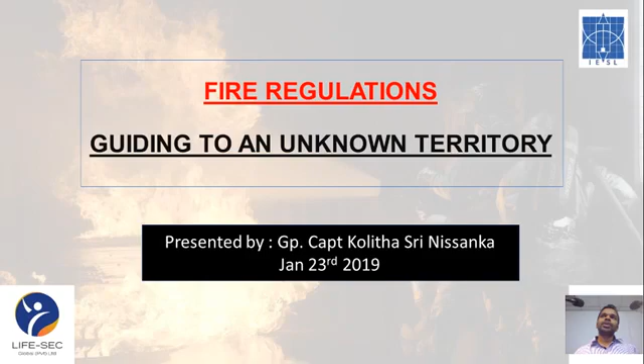Sri Lankan fire regulations were recently revised in 2018 with comprehensive attention for high-rise and super high-rise buildings. In this lecture, we are about to discuss important aspects of designing and maintaining fire systems and life safety systems for those skyscrapers.

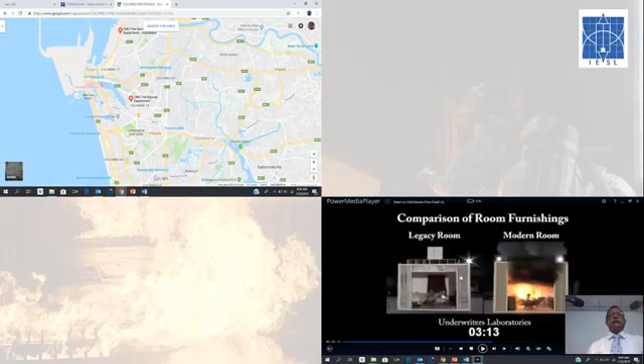Now I just want to share one slide - I am showing where this Colombo Fire Brigade is located. We have 4 stations in Colombo Fire Brigade responding to fires in the city of Colombo. I don't think it's very clear, but we have 4 stations.

This is a US test done on a room fire. It shows that within 3.5 minutes the entire room comes to a flashover point - that is, the total room is burning. So you have 3.5 minutes to respond, and you have 4 fire stations in Colombo, and you know the traffic - how long it will take to reach the incident, and then the time to reach 30 floors or 40 floors, what time will that take?

My sequence will be: I will review and give an overview of regulation, specification and standard - what is the clear distinction, what is the difference between them. The fire brigade requirements - what do you mean by a fire brigade requirement? CIDA regulations, important aspects of CIDA regulations, and then we will go for questions.

Now, who is the regulator? I was trying to go through the web and find out who is the regulator of fire safety. Who is in charge? Who is the implementer? Now we have the Motor Traffic Act, we know the regulator, we know the implementer. There are regulations, you go on the road drunk, you will get fined. Now here, who is the regulator in fire?

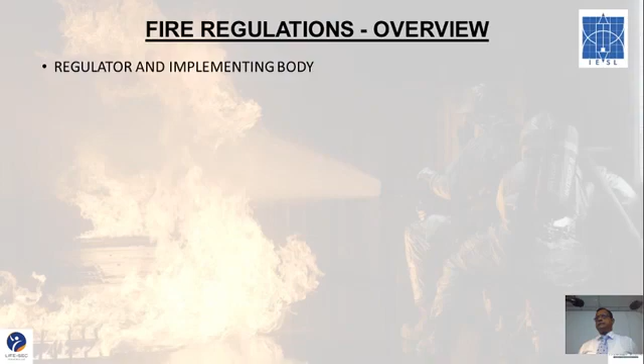Now the buildings are regulated by the UDA and the urban councils, and when you want to put up a building, you need to go to either UDA or municipal council to get the approval. Similarly, CIDA, which has now got an act passed by the parliament, it talks, we'll just glance through what it says.

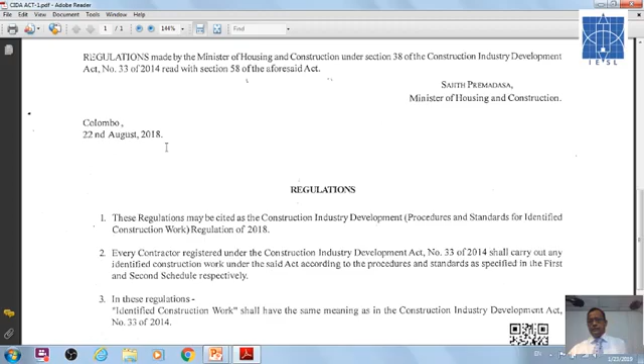It's passed in 2018. Every contractor registered under the Construction Industry Development Act number 33 of 2014 shall carry out any identified construction work under the said act according to the procedures and standard as specified in the first and second schedules respectively. It clearly says you have to comply, and we'll see what the two schedules are.

Under schedule 2, they are referring to 2 regulations. The CIDA fire regulations and the CIDA specifications. There are 2 documents. This is fire regulation, this is a specification. This was done in 2016, this was revised in 2018.

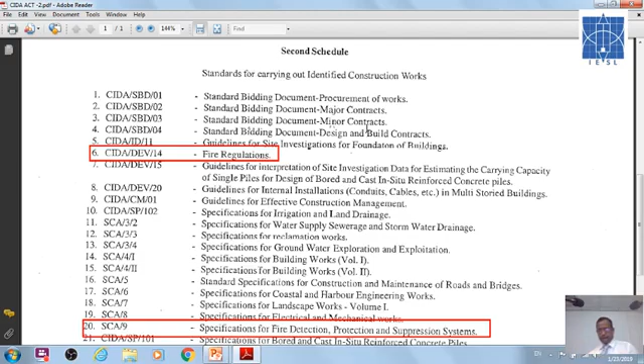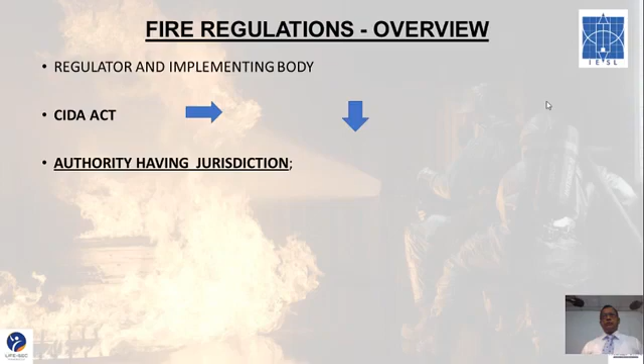Now there is another party coming into play, that is the authority having jurisdiction. Now here we call, what is the authority having jurisdiction is the local fire brigade. So far we see them as the implementing body. Finally, once you do your system, you want to get the certificate, you have to go to the fire brigade and get the certificate. The best part is the fire brigade has their own requirements.

I will show one of the requirements. This is a requirement given to a project. They give a requirement saying this is from the fire brigade. You go to the fire brigade with your drawings, you have to sit there, you give it to them and they will give you this requirement. So you see, they give their requirements, they are the regulator and the implementer, both one party.

What will happen? So I don't want to comment further on that. So that's why we are focusing on the CIDA, and we are trying to tell the fire brigade, you need to comply with the CIDA fire regulation, that is the governing regulation in this country.

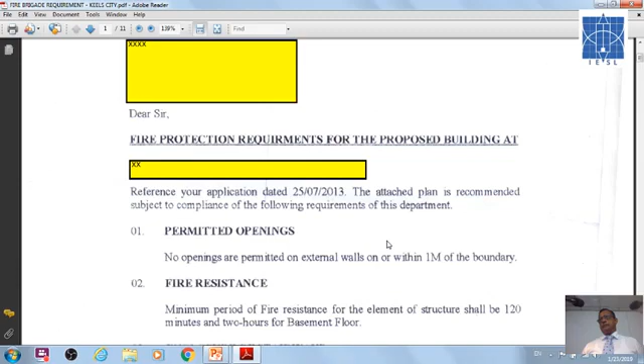So on 30th of next month, we are going to have a seminar. We want to call all the fire chiefs at the CIDA, educate them on the fire regulations.

Now, what is a regulation? Regulation, I got it from Wikipedia. A rule or order issued by an executive authority or regulatory agency for government and having a force of law. So a regulation is having a force of law. When you have a force of law, you can be convicted by a court of law.

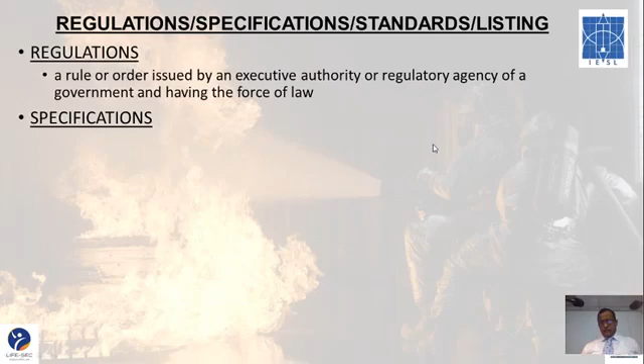The specification. What is the specification? We define it as the act of identifying something precisely or stating a precise requirement. We call this document a specification. Later we want to call it a code of practice. Say you have a fire detector, we give a specification for the fire detector. We have a fire pump, you give a specification for the fire pump.

So the regulation and the specification are two different things. Regulation says what you need to do. You need to install a fire pump. The specification will tell you what type of fire pump you need to install. So there are two distinguished areas, specification and regulation.

Then what are the standards? Something considered by authority or general consent as a basis of comparison, approval, or model. Now here we normally focus on NFPA, National Fire Protection Association from the USA, and the British standards. Now people are asking, why won't you go for German standards, Japanese standards, or later why not Chinese standards? They will come and tell all this.

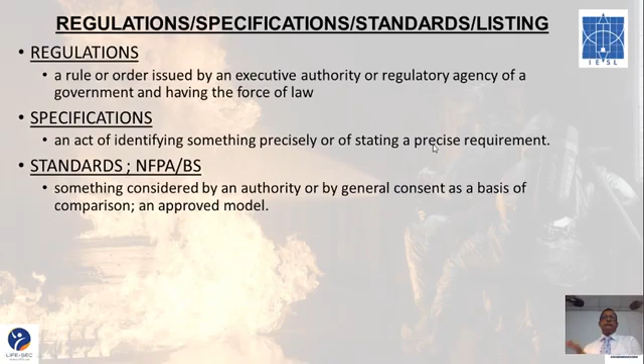Now we have decided to have our vehicles right-hand drive. We decided that long time ago, and we imported vehicles which have a right-hand drive. But there are other countries who have left-hand drive. So we can't argue, the left-hand drive vehicles also can go at high speed. But here we have decided, we are focusing, we are referencing these two standards.

Then the listing. We have listing. What it means by listing is a certification from a third party. The NFPA and the BS are standards. Standards will say, now if you talk about sprinklers, the NFPA will say go by sprinkler standard NFPA 13. So it will give you how to design a sprinkler system for a particular standard.

Recently I had a problem. We supplied equipment and the equipment was UL listed. UL listed means it complies to NFPA standard, because NFPA is a USA standard. UL is a USA governed body, and anybody can get a UL certificate. It doesn't need, even Sri Lankan we can produce a product and get a US certificate. So this project manager was telling, you have given me a UL listed pump, but we do our electrical design as per BS, so your fire pump electrical panel does not meet our standards.

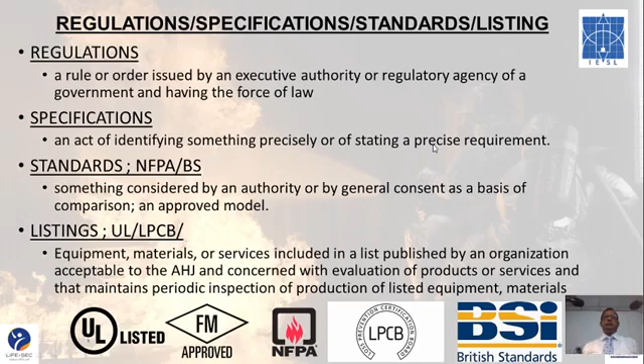I was feeling sorry for him, because you need to define NFPA and UL are different, BS and LPCB are different, their standards are different. So when you say your fire pump has to be listed, that means it has to be certified by a third party. Say your fire panel has to be listed, that means it has to be certified by UL, LPCB. Even the DIN standards are there, but focus is on UL, FM and LPCB.

Fire regulation initially published in 1997, revised in 2006, and latest revision is 2018. It took more than 2 years to do the revision, and people from IESL, Institute of Architects, Institute of Fire Engineers, Fire Brigade, everybody was involved in this committee. So it was an idea of all professionals in the field to put this document through.

Now fire regulation, this book we had divided into 8 chapters. I will not have time to cover all the 8 chapters, but the things I have highlighted in red, we will just go through that to see what are the important areas.

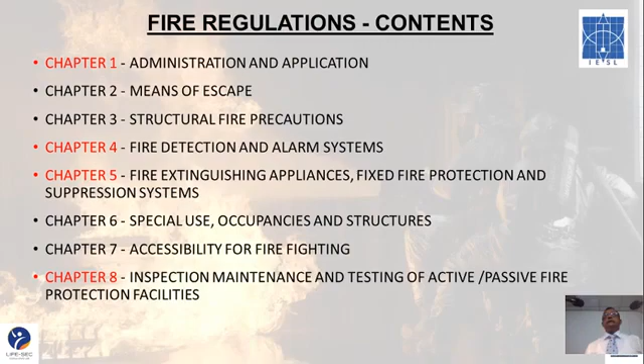New edition focuses on a few key things. One is the residential dwelling, because this regulation has purpose groups. Purpose groups mean, say now this hall is a lecture hall and this is an institute, so the institute goes as a purpose group as institute. If you take a hotel, the purpose group is a hotel. If you take an office, it's an office. Now earlier we didn't have a purpose group for the apartments.

So apartments, people who are constructing apartments had various ways of getting out from the regulations. If you go around to apartments, we say any building over 30 meters has to be sprinkled. You check the apartments, they are not sprinkled. But since there were no purpose group, they had some escape path.

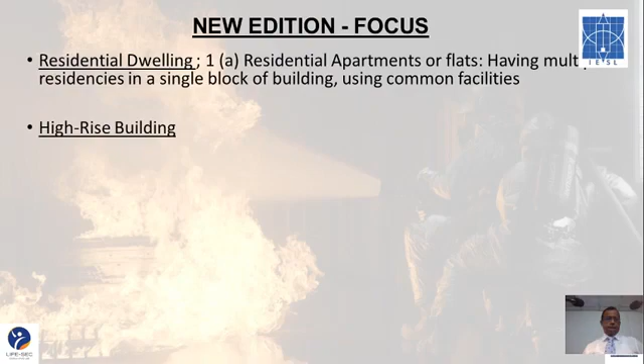Then the high-rise building. A high-rise building is a building which is more than 30 meters high, up to 60 meters. And now the new concept came, a super high-rise building. What is a super high-rise building? It's a building that is more than 60 meters high. If you take 3 meters per floor, that is 20 floors and above, and we call them a super high-rise building. For super high-rise, basically we have stringent regulations, and we'll touch on a few.

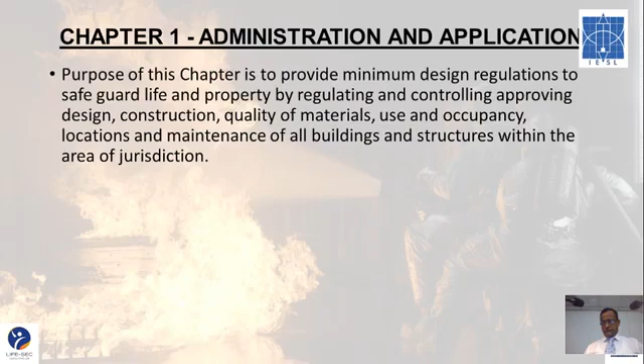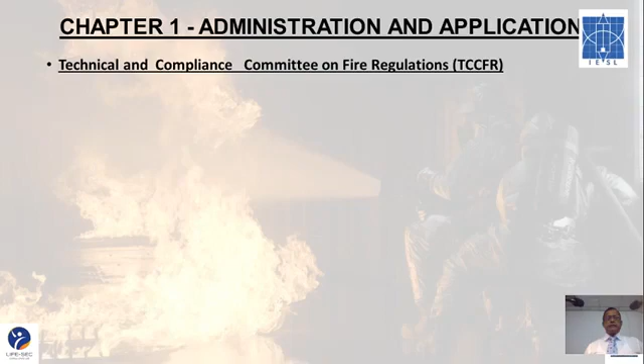So the first chapter talks about the administration and application of the regulation. Under this chapter, CEDA has appointed a technical compliance committee on fire regulation. They have a 5-member committee. They are responsible to advise the authority having jurisdiction on any technical matters where such advice is required to take a final decision. Say you take your plan to the fire brigade, then they come to a dispute, and say I don't want to sprinkler my building, but I cover certain regulations. If there's a dispute, the client can come to the CEDA and make their complaint.

On the other hand, it has to be very careful. The occupier who is occupying a building, he knows the regulation and he occupies an apartment. He knows that that apartment is not sprinkled, and he sees the regulation that you need to sprinkle. Then the developer is in question. So then this committee will take a decision whether to put sprinklers or what needs to be done.

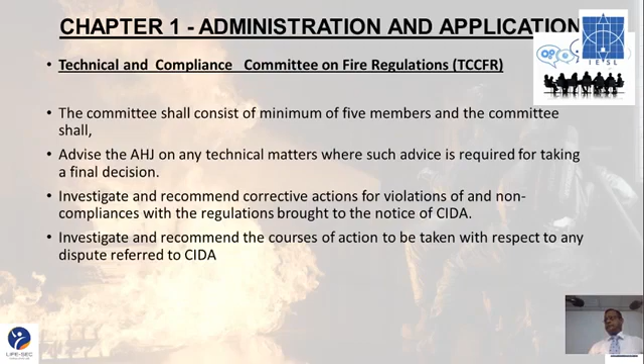Investigate and recommend the course of action to be taken in respect of any dispute referred to CIDA. So that mechanism will come maybe another 1 or 2 months, it will be enforced. We don't want people to come to CIDA and stay in a queue and say my building, this building, ABC. There will be a procedure laid out, a payment will be charged. So there will be a procedure put down by the CIDA.

Then the system install. Now today what happens, anybody can do any systems. If I want to start up a business tomorrow, I can do a fire system tomorrow. We strongly say any contractor has to be registered with the CIDA. There are categories under which you can be registered, and only people who have qualified for certain requirements can do high-rise buildings or super high-rise buildings.

Now what about these Chinese guys who come and do this work? It's a big question now, whether they are authorized to do that, and for any violation, how can we take them to courts? So all those are questionable. One thing we must say, when we had this regulation, CIDA published it on the web, and we waited for 1.5 to 2 months to get public comments. Fortunately or unfortunately, we got only one guy commenting.

So where were others? We had a seminar, about 200 people came, nobody commented, nobody said a word about the regulation. We wanted public opinion, your input to at least revise or do additions to amend the regulation, but nothing happened.

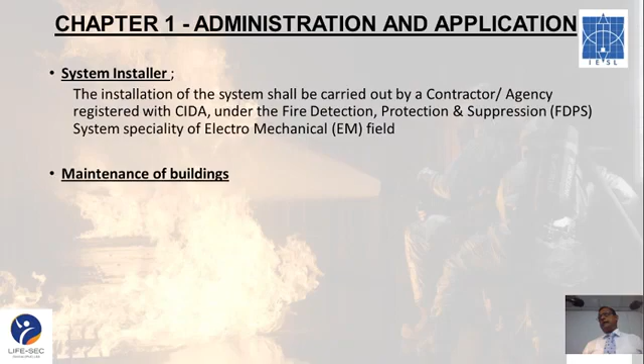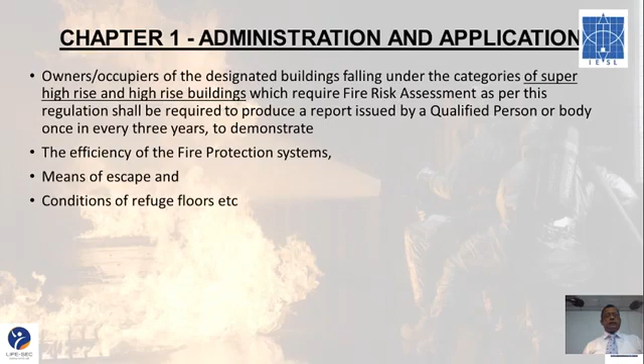Anyway, now the document is out, you can buy it, and it's governed by an Act of Parliament. So the people who do any installation are under certain law of this country. Maintenance, people neglect maintenance, but under this act, people have to maintain their systems. Owners and occupiers of any high-rise, super high-rise building, every 3 years have to do a fire risk assessment and get certified from a qualified person or the authority having jurisdiction, about the efficiency of the fire protection system, the means of escape, condition of the refuge floor. Those are the areas they will have to go and check.

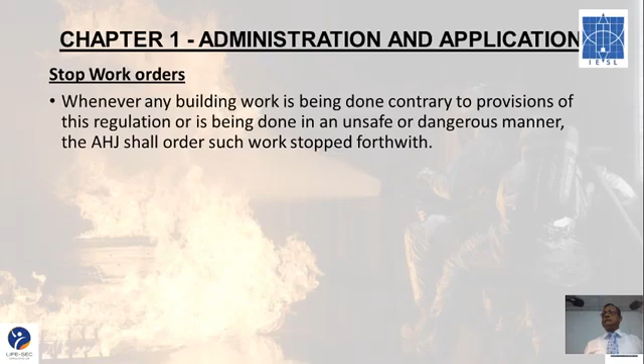Stop work orders - it doesn't happen here. If any site does not abide by the regulation, the fire chief can go and do a stop work order. In time to come, it should happen. I hope the fire brigade has some guts to do that. On receipt of some notice of stoppage work, they had to give it in writing - okay, we didn't do the sprinklers, but now we are compliant with the regulation - giving in writing that we will comply with the regulation and proceed with the work.

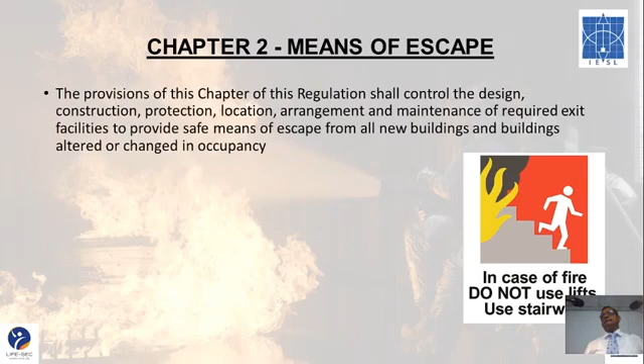Then chapter 2 talks about the means of escape. If you are an engineer involved in this field, go to the new buildings which have been done recently and check the means of escape. You will see those means of escape in some buildings are not done properly, especially the smoke-free lobby. There are no smoke-free lobbies in some very key buildings here. I don't want to mention names, but it's not done, right? If you go there, your means of escape is not protected, which means in case of fire, when you are going out, you will be under the smoke, you will not see anything.

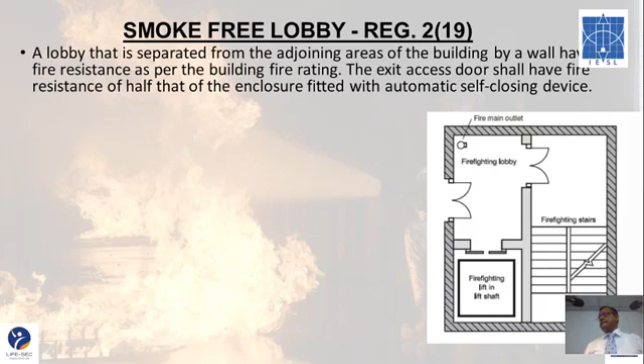The design of the smoke lobby shall not impede the movement of occupants through - that means the clear passage should be there for people to move through the smoke-free lobby to the escape, that is the firefighting staircase. Floor area of the smoke lobby shall not be less than 3 square meters. And if the smoke-free lobby is taken as the firefighting shaft lobby, it has to be 6 square meters of space. You can't have a 1 meter stretch covering 6 meters - minimum should be 2 meters. Adequate space must be there.

Then chapter 3 talks about structural fire precaution - I will not go into detail. That is to prevent fire spreading from one area to another. Now the Sri Lanka standard today is the compartmentation size is 2000 square meters, and if the building is sprinklered, you can go up to 4000 square meters. So if you take this hall at 6000 square meters, you can't have an open hall like that. If it's sprinklered, you need to compartment it for 4000, you have to divide it. That is what is meant by compartmentation.

And even floor-wise, you've seen a lot of people talk about the Grenfell fire - people are brought here to give lectures, right, we invite them. What happened? There were no barriers. The fire spread to the outer wall cladding, and smoke went through the inner ducts. Even if you go to buildings today, I check half of the building, the ducts are not sealed, there is no protective sealing done. Sometimes they come to the fire brigade and ask, can we only seal the electrical duct, because the water duct doesn't carry any electrical components, so there won't be any smoke building up in the plumbing duct? No - smoke can move through the plumbing duct to other floors.

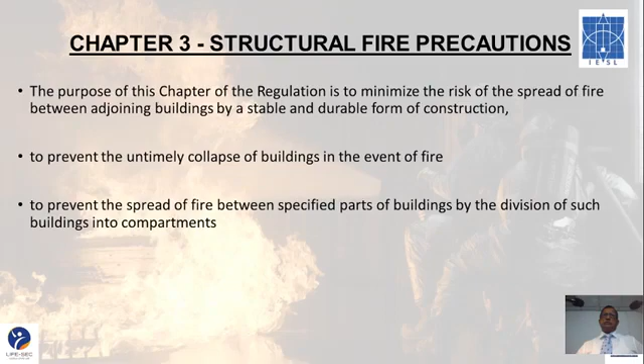Another thing that came into the regulation is the refuge. Now any super high-rise building over 60 meters has to have a refuge area every 10 floors.

You count the 10 floors from the top, not from the bottom, because people from the top will travel down. So every 10 floors you will have a refuge floor and a refuge area for people to stay until the fire is being fought and people are evacuated slowly.

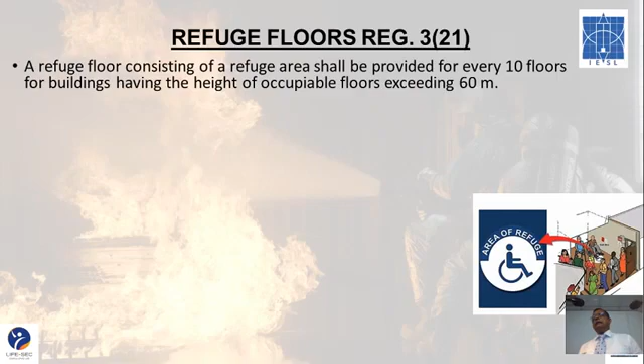How do you calculate? You take the occupancy load of the 10 floors, take 50% of that, and for that area you have to keep a minimum of 0.5 square meters per person. I will not go into detail on how you calculate occupancy load, but if you take a hotel, occupancy load is 2 people per room. If there are 100 rooms, that's 200 people, so 50% is 100 people. 100 into 0.5 is the area.

It's very simple, and you need to have cross ventilation, 25% area on 2 sides. So the refuge floor is a very important aspect in a super high-rise building, and you need to ensure that your building has that refuge floor.

Why do you need a refuge floor? Because people at top floors cannot come to the ground floor within 3 minutes. So they will come down the fire staircase and rest maybe at the refuge floor and come down like that. If the building is on fire for 3 hours, 6 hours, people can travel but shouldn't wait there till 6 hours - maybe within 1 hour they should come down, because the walls are rated for a maximum of 3 hours fire rating, so they should come down.

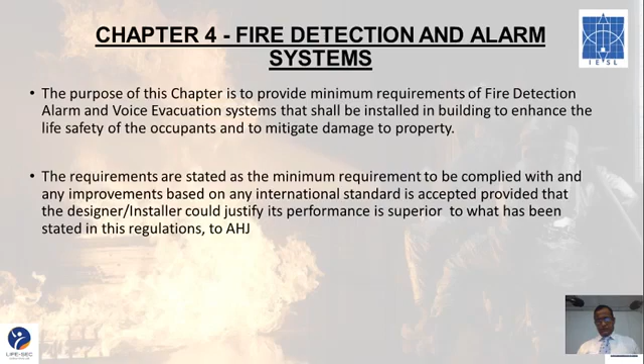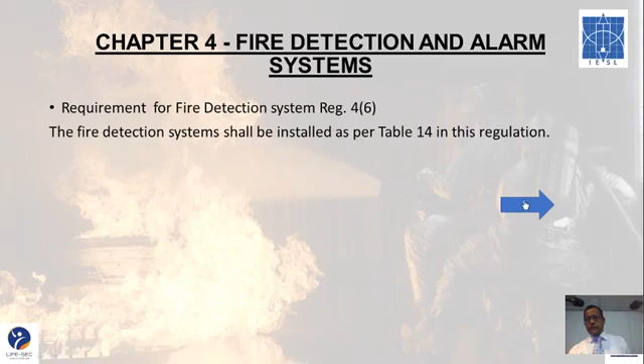Now the regulation gives a very brief guideline. Say you want to design a building and want to know whether it needs a fire detection system or not - whether I should put detectors, call points, voice evacuation, fireman communication - so we made it very simple. We are given Table 14, where purpose group is given, height is given, then manual point, fire detection, voice evacuation, fireman communication are given as required or not required.

So it's very easy to refer. You are designing a building, you refer this table and see, yes, this building requires this, that's the regulation. Then you go further to design the system as per NFPA or BS or the fire specification. One thing is, any building with over 100 detectors should go for an addressable fire detection system, not a conventional system - that is in the regulation. So this table is a very quick reference guideline.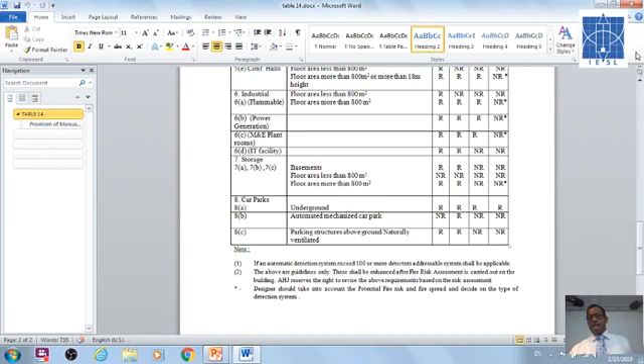Fire alarm control panel has to be at the fire command center. Any high-rise or super high-rise building will have a fire command center, 10 square meters in size. Now some buildings find it very difficult to locate this fire command center - why? Because the ground floor is the most important floor in a building, high value commercially, you can put a shop there. If you can put a shop, why are you putting a fire command center? Commercial value is there, but it's very important you have your fire command center at the ground floor.

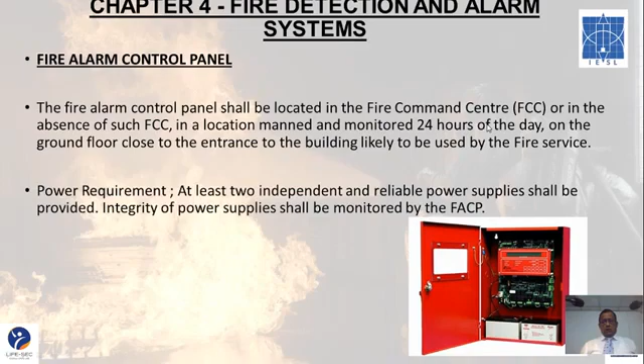Power requirement - at least 2 power sources, main and battery power, should be there. How do you check the battery power? You have to keep the fire panel for 24 hours on battery and check the alarm for another 5 minutes. So if you are going to check a fire system, you need to switch off the main power, keep the fire alarm panel on battery for 24 hours. After 24 hours you sound all the alarms, and for 5 minutes the battery should be able to keep the system going with all the sounders working.

On normal operating conditions, if you want to check a system after installation, you have the entire alarm going for 30 minutes on the battery. So if somebody had not done the proper battery calculation, what will happen? After 5 minutes, the panel will go to a halt. That is the requirement.

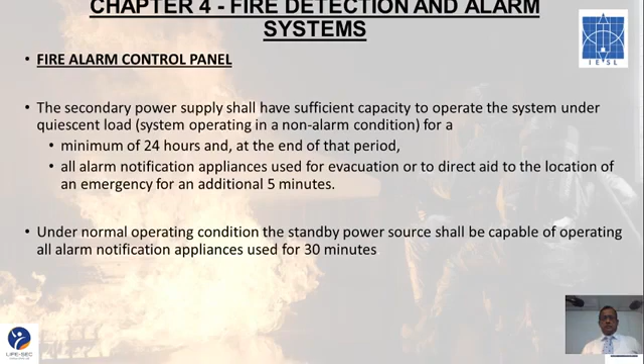Sound level should be 65 decibels, 10 decibels above ambient. Noise level should not exceed 120, and especially in a hotel or apartment, 75 decibels at the bed head, at the pillow, with all doors closed.

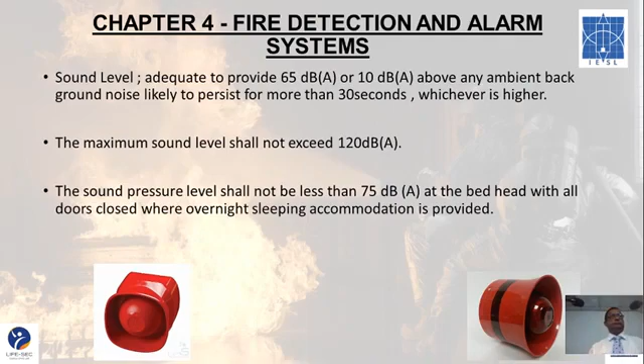Visual alarms - why should you have visual alarms? In a hospital, can you have alarms going off for a false alarm? The fire detection system is there to detect fire, not to have alarms going and evacuate people. It is there to give a signal saying there is a fire. People have to react and extinguish the fire, not wait until the alarm goes and everyone runs out of the premises. That is not the purpose of a fire alarm system.

Where accommodation is provided for disabled people, both visual and audible alarms must be provided. Visual alarms must be installed 2.1 meters above the floor, and less than 150 millimeters from the ceiling.

Voice evacuation - what do you mean by voice evacuation? People take a public address system as voice evacuation. You can use it, provided the public address system is monitored, the cables are fire rated, and if a speaker is removed it gives a monitoring signal. The voice evacuation system is used to evacuate and guide people in case of a fire.

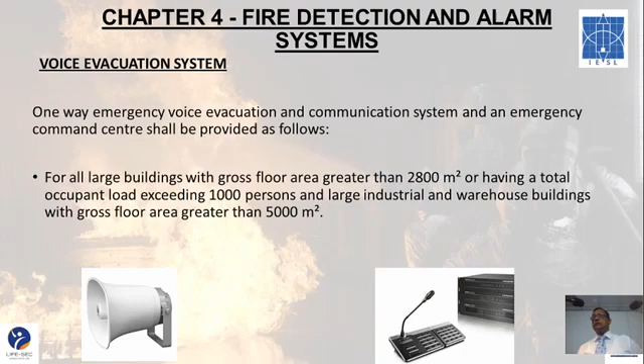Voice evacuation is required in a building greater than 2,800 square meters or a total occupant load of 1,000 persons, or in an industrial warehouse where the floor area is more than 5,000 square meters. Especially in high-rise and super high-rise buildings, voice evacuation is a must.

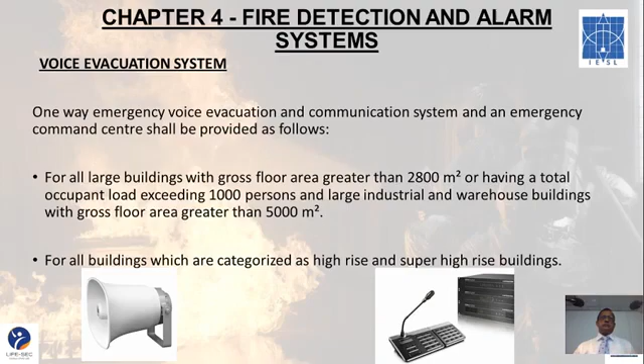Voice evacuation activates automatically when detectors are triggered, giving a voice message saying there is a fire on the 29th floor, please be patient or please evacuate, and simultaneously giving another message to other floors: there is a fire at the 29th floor, 30th and 31st floor please evacuate. Sounders will only give a sound, they will not give you direction. So this type of building needs a voice evacuation system.

Firefighters telecommunication is another requirement in high-rise and super high-rise buildings. Why do you need it? So firefighters can speak with each other inside the building. If you go to a pump house in the basement, your mobile will not work, there is no way of communication, so you need a firefighters telephone communication system installed.

It's required in every firefighting lobby, in basements where the number of basements exceeds 2, firefighting related mechanical rooms, fire service lift rooms, areas having smoke control equipment, each area of refuge, and also the fire pump room.

The circuits must be monitored - that means if there is a cut, breakage, or defect in the cabling, it must be monitored by the fire alarm panel, so the system is monitored 24 hours.

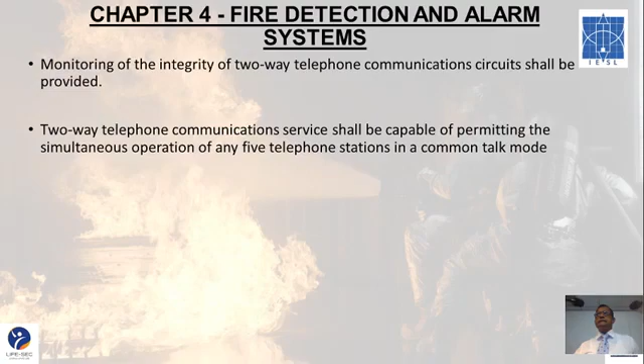The two-way telephone communication system must have 5 telephones working simultaneously. That means if 5 firefighters go to 5 floors, they can plug in their phones and 5 people can talk simultaneously. You can't have only one telephone working at a time - that is not approved. You must have 5 telephones where people can speak simultaneously.

Temporary building construction must have a siren. That is something we have newly put in.

That covers fire detection, the main areas. If you go to the document there are so many things you need to abide by. Please refer to the document if you are designing a system or if you are the developer. It's always better - I have been in the construction field for maybe the last 12 years. What happens is people don't decide at the initial stage, and meetings become a place to come and fight with each other.

Sometimes halfway through building construction, they decide to put detectors inside the apartments. The building is already 5 floors raised and they decide to put sprinklers in the apartments. So decisions are not taken initially. To avoid that, it's always better to go through the specification, go through the requirement, design your building, get it cleared, then proceed.

Similarly, on the fire protection side, chapter 5, we have also given a table. That table shows purpose, scope, height of the building, whether you need fire extinguishers, whether you need hose reels, whether you need landing valves, whether you need sprinklers.

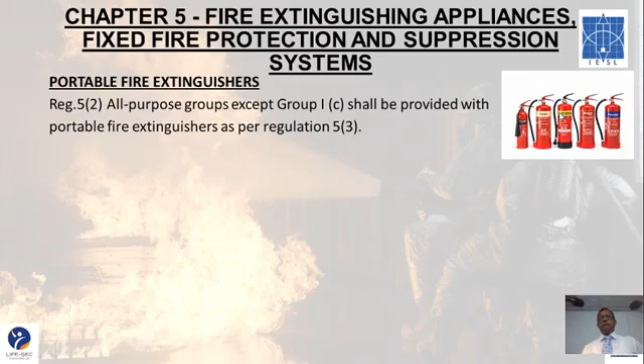Maximum design pressure is another thing we incorporated. It's set at 20 bar - you can't exceed your fire pump or system pressure beyond that. The NFPA standard is 23 bar, but there's one project in Colombo now requesting 30 bar pressure. So if your system is 20 bar, what should be your testing pressure for the pipes?

It's 1.5 times the design pressure. So if it's 20 bar, how much would that be? Once you add the rest, it comes up to 30 bar. The GI pipe maximum burst pressure is 40 bar, so then you have to go for PN25 or 40 valves. So many things you have to consider - that's why we set it at 20 bar.

Why are people going for high pressure? They want to avoid putting pumps in the center of the building. Some projects here in Sri Lanka have pumps on the 29th or 30th floor - they transfer water using tanks, and the balance section is run by those fire pumps. So if you have a high pressure pump, what they want to do is knock off the pumps at the middle stages and pump water right from the bottom.

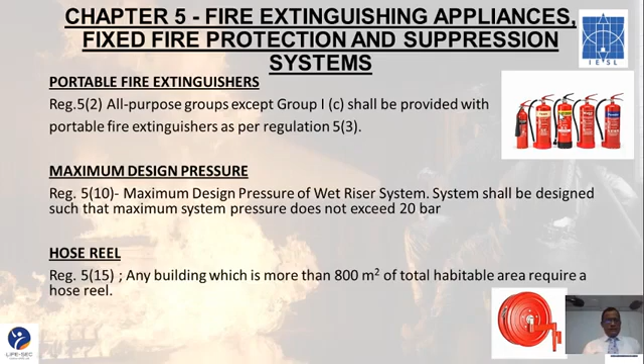Hose reel - any building over 800 square meters needs to have a hose reel. I'm just running through this quickly - I have 53 slides to cover in 60 minutes. These are all in the document, not just my words.

Landing valves - any building over 900 square meters needs a landing valve, and over 18 meters height as well. What is a hose reel? It's a first aid system that people in the building can use. A landing valve is equipment that carries water, used by fire brigade personnel when they arrive during a fire.

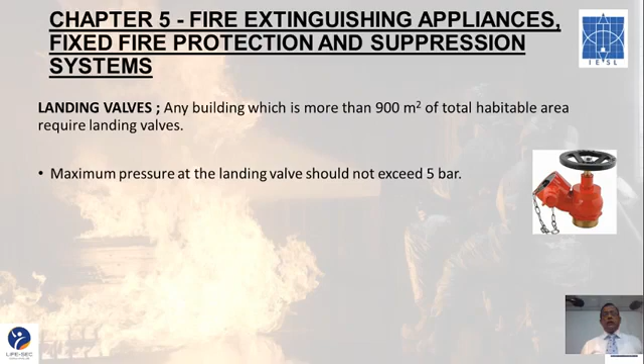Maximum pressure is 5 bar, minimum is 4 bar at the landing valve, with a flow rate of 500 liters per minute. Now some engineers, even when the pressure is 11 or 12 bar, still keep it at 1500 liters per minute, because three landing valves must operate simultaneously - meaning the fire pump should deliver 1500 liters per minute, since three landing valves should operate, that's 500 times 3.

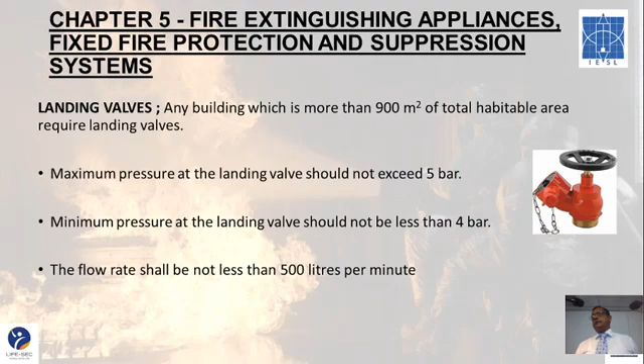So what happens when the building is high and the pressure is high - there are no pumps that deliver 1500 liters at, say, 15 bar. So you need to adjust the flow to maybe 800, 900, or 1000 liters per minute.

External pillar hydrant - any building with a footprint area more than 1000 square meters needs a pillar hydrant. So it's very clear - any factory over 1000 square meters, or any housing scheme with 100 units, needs to have a pillar hydrant system.

Breaching inlet - traditionally we had only one breaching inlet, but with high-rise and super high-rise buildings coming up, you need an additional fire brigade inlet to pump water to the sump. This is because fire brigade vehicles cannot pump water beyond 10 or 14 floors. So if the building height is 60 meters, you need to use internal fire pumps to pump water, since the capacity of the water tank is limited - once it's over, fire vehicles need to pump water into your sump.

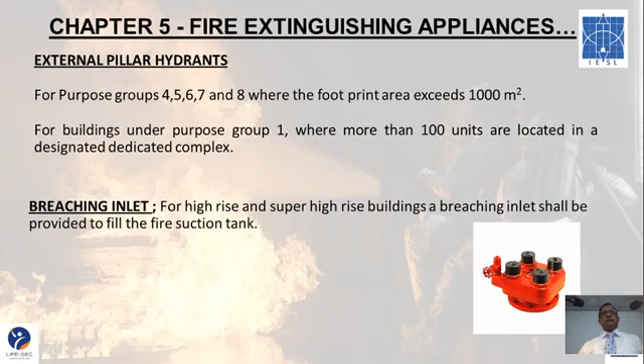Another new requirement is fire protection for buildings under construction. If the building is under construction and less than 60 meters, you need a dry pipe with a fire brigade inlet, and all floors must have a landing valve. If it's more than 60 meters, you need a wet riser. A wet riser means the system is fully charged with water, while a dry riser has no water but has an inlet - when the fire brigade vehicle arrives, they can pump water into it.

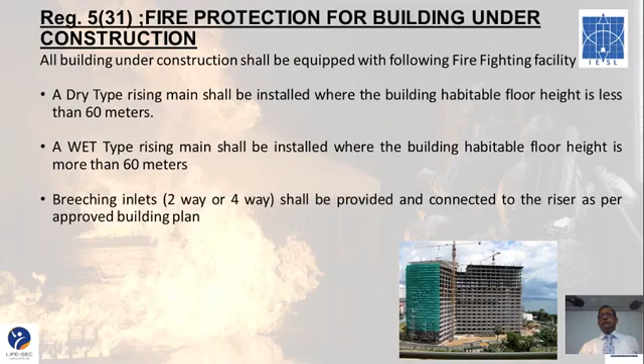Breaching inlet you need to have power supply - you can take it from a generator, that is acceptable - and you have to have fire brigade access facilities 4 meters wide, with 4.5 meter clearance to the side. Portable fire extinguishers shall be provided at each floor level.

Buildings under construction, fires had occurred. I have heard of many buildings getting caught fire under construction, but no firefighting facility. So it's always better, when designing a building, that when you are reaching say the 20th floor, you have your fire pumps installed and the riser working, so then you are protected.

Sprinklers, I will not go into detail. All indoor car parks and any high-rise or super high-rise building need sprinklers. Some get an exemption saying they have fire doors, the apartment is not high risk, so they don't need sprinkler piping. But how can we do sprinkler piping? There's no ceiling, so the pipes are exposed.

But any high rise and super high rise building needs to be sprinklered. There are ways or means of hiding your pipe - you can have side wall sprinklers and take the pipe on the wall. So there are no excuses for super high rise and high rise buildings.

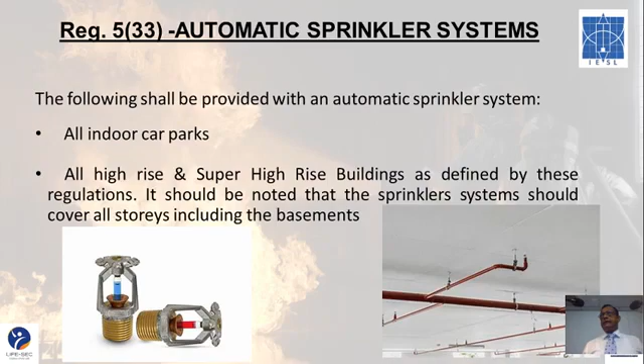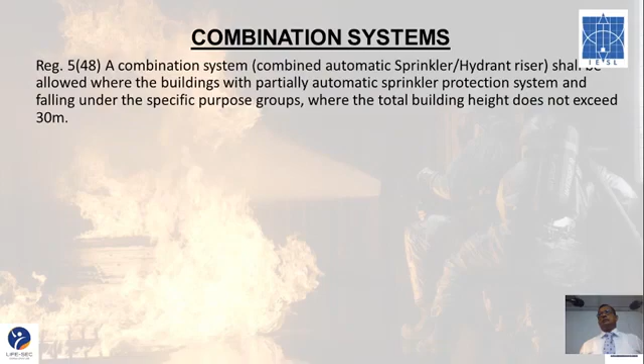A new thing we have introduced is the combination system. NFPA 14 allows it. Previously, any building less than 30 meters with sprinklers and hydrants used to have separate pumps for sprinkler and hydrant. Now, any building less than 30 meters with sprinklers and hydrants can have one pump set, one riser. So having another pump set is not a requirement now.

The fire pump always has to have a positive suction. I hope everybody knows what is a positive and a negative suction - fire pumps have to have a positive suction. The BS allows negative suction with a priming tank, but we don't recommend priming tank suction, because I have seen it in buildings I have done - with negative suction they have problems. Pipes are corroded, you had underground piping done, you can't replace the pipe, and you've put another structure on top of that pipe. So many things happen.

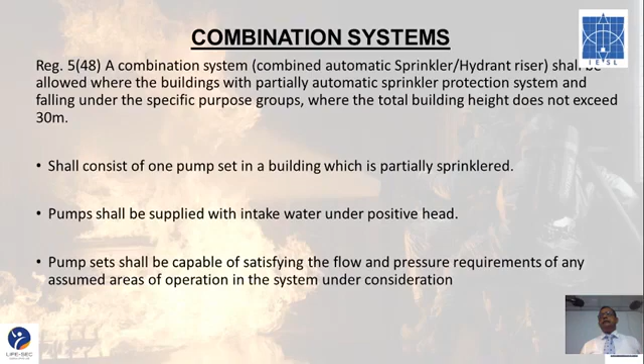The pump shall be capable of satisfying flow and pressure requirements of the assumed area of operation under consideration. That means it will have a flow rate which is the minimum flow rate of the sprinkler plus the hydrant requirement. So the minimum for light hazard is 1100 liters per minute, hydrant is 1500, add the two is 2600 liters per minute - your pump should deliver that water.

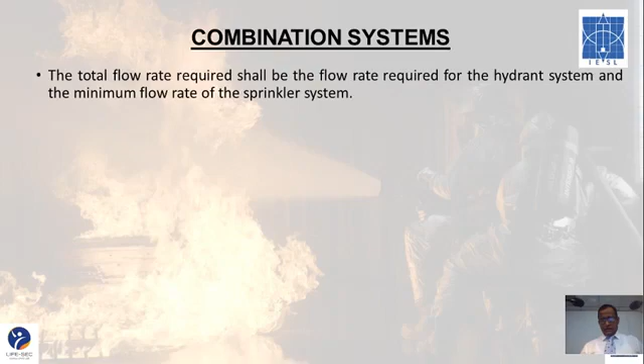So in the combination system, one pump, but the flow rate is high. The pressure has to be the pressure required at the furthest point in your system.

Now, for sprinkler and hydrant hose system, separate pumps shall be provided for hydrant and sprinkler installation, other than the combination system. For any other building, any super high rise or high rise building, there should be separate pumps for hydrant and sprinklers.

Drivers for pumps at a single installation shall either be electric or diesel engines. For super high rise buildings, we have introduced a diesel engine, or alternatively you can have a generator supplying direct current to the fire pumps. It has to have the backup facility of a diesel engine. Imagine you have a fire, say Chandrila, 54 floors, and there is no power - what are we going to do? There's nothing we could do except start up the generator and run the pumps. So for super high rise buildings, as much as possible, try to have the standby pump as a diesel pump.

Fire pumps will be listed for the application. Most of the projects we have, water pumps running in the fire system are blue colored. Color is immaterial, but the performance criteria doesn't meet the requirements of a fire pump. I will show a diagram later.

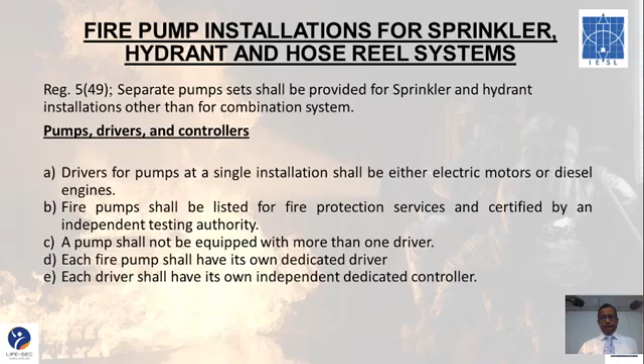Another thing is the pump churn pressure. What is the churn pressure and the shut-off head? What is the difference between a shut-off head and a churn pressure? Shut-off head you can test at the factory - you shut off your outlet and run the pump, you get your shut-off head. Churn pressure is when you run your system with no flow condition - the pump is running, you close all your valves, but the head will come to the fire pump, so it's running with no flow, that's the churn pressure. You have to check the churn pressure of the pump and it should give the required pressure at that ground level - otherwise your furthermost hydrant will not work.

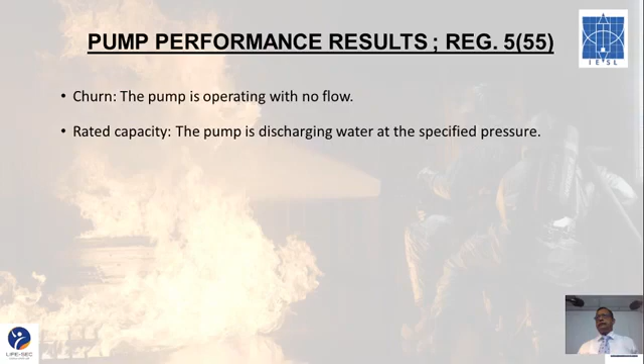Rated capacity means the pump will discharge at the rated pressure and flow. Overload of the pump means it discharges water at 150% of rated flow, at a pressure drop of 65% pressure.

Now what happens when you have three hydrants running at 1500 liters per minute at a given pressure, and somebody opens another valve? The pressure will drop and the flow will drop. Actually the flow will still be there, but the pressure will drop.

For the fire pump, there is a requirement. You should maintain 150% of the design flow rate, and when you achieve that 150% of the design flow rate, the pressure should not drop below 65% of your rated pressure.

Example: your pump is 10 bar, 1500 liters. What is 150%? 2250 liters per minute. So the pump should give 2250 liters per minute at 65% of the pressure. 10 bar at 65% is 6.5 bar. So the pump should not run at 4 bar and give 2250.

Another thing I have observed is the rated capacity. Now I am showing a small pump curve. There is a design point, this is the 150% flow rate, and this is the shut-off rate.

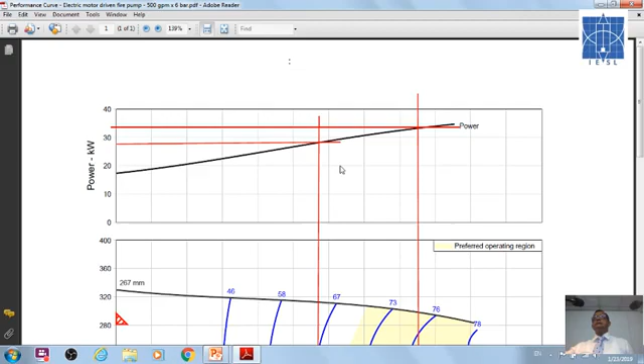So what we are telling is that the regulations say at 150% of the flow rate, your pressure should not drop below 65%. These flow rates are there in the document.

One key point: now there are buildings with tower 1, tower 2, tower 3, and in each tower you have 2 or 3 risers. Earlier we had 1500 liters per minute at a given pressure with no extra requirement when adding a riser. Now each time you add another riser, you have to increase the quantity of water by another 500 liters, up to a maximum of 3000 liters on a hydrant system and 2500 on a sprinkler system.

Now you have a system with one riser where the pump is given 1500. Now your building becomes multi-tower and you are using the same pump. What do you do? For other risers you have to add another 500 liters of water each, up to a maximum of 3000. Beyond that, you have to go for a different pump.

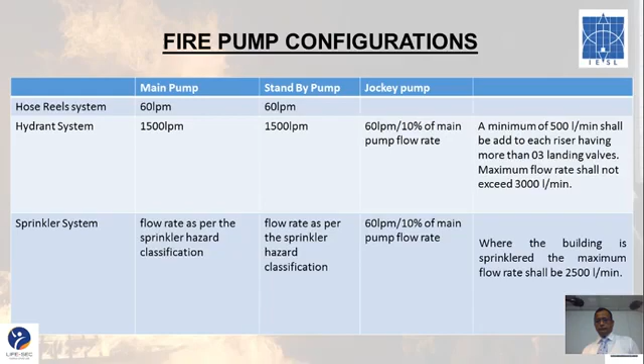All these fire pumps should have positive suction. If you can't achieve positive suction, you must go for a vertical inline turbine or vertical turbine pump. If the client says they don't have space to put the tank above ground, you can go below ground, but you need to use this type of pump.

Automatic pumps will start automatically but must be stopped manually, for both sprinkler and hydrant systems.

Once the pump starts, an audible signal must go to the pump control room, to the fire alarm control panel, so that control room personnel know the fire pump has started.

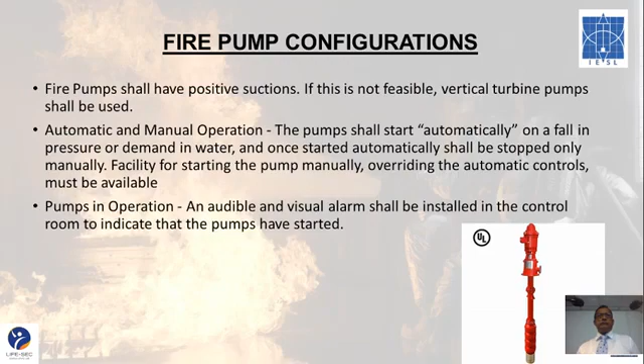In the event of main power failure, where both pumps are electrically driven, alternate power shall be provided for the operation of the fire pumps. The standby power should go to both pumps, not just to one of them. Don't think that standby power is meant only for a standby pump.

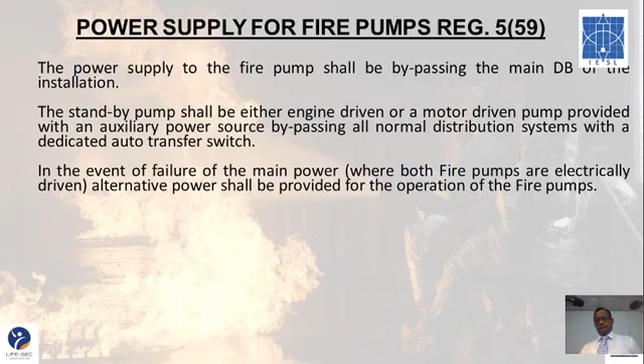Transfer of power control between the normal supply and the alternate power shall take place at the pump room. This is debatable since most people want to bring just one cable from the transformer, but what NFPA says is that two cables have to come to the pump house, and the transfer of power should take place there. One cable comes from the grid power, the other from the generator power. The transfer ATS should be at the pump room, not at the DB room.

And some engineers design the pumps to be located at the rooftop.

Here is a good design. You can take advantage of the head, but you need to run your fire rated cables up to the top floor. So what happens in case the pump doesn't start? Some defect occurs, somebody needs to run up to the pump house during a fire.

Who is there to do that? Are you trained? Our people are trained to do that. I was in the fire brigade for 5 years at the time of war. The Air Force took over the fire brigade.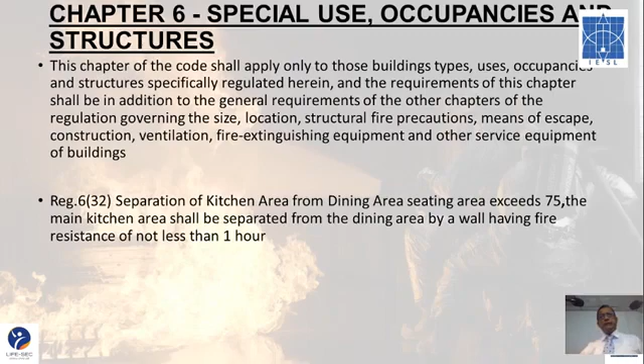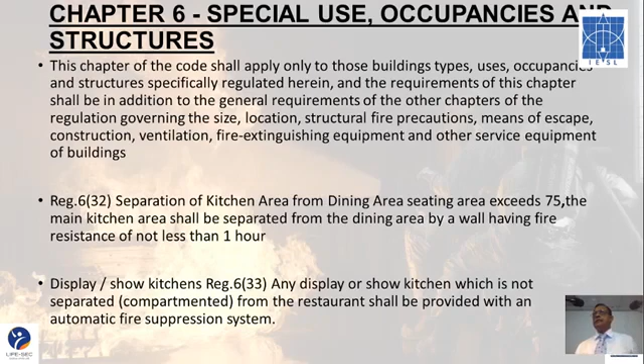You have a show kitchen and you are putting a wall. What is the purpose? There is no show in it. So what you can do is have a fire curtain. It's always open. At the time of fire, the curtain will come down and give protection, give fire resistance, making it a compartment. And if show kitchens are there, you need to go for a fire suppression system, kitchen hood fire suppression system.

Chapter 7 talks about accessibility for the firefighting vehicles. Now what happens? We put up the building, everything is fine, all done as per standard. But we put up a pond in front of the building, or a barrier which opens halfway, and the vehicle cannot go. So you need to keep 4.5 meters clearance up and sideways for the fire vehicles to enter.

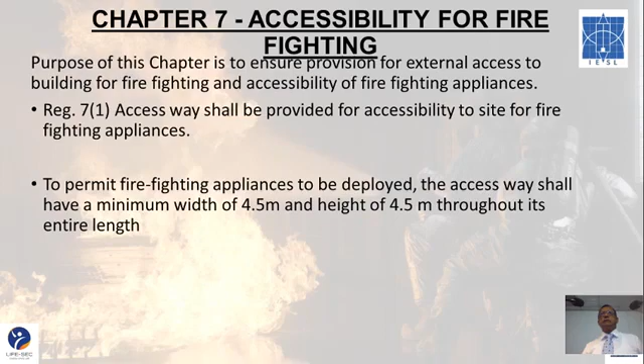And especially if it's a high-rise building, you need to have a hard standing. What is a hard standing? This aerial ladder platform must be lifted. Before it lifts, it has to have its jacks jutted out, and the vehicle will come and stand on the jacks. So you need to have 6 meters clearance for this.

Now the hard standing must be minimum 2 meters from the building, maximum 6 meters. Now most of the buildings have podiums, we have seen podiums, and only after the podium does the structure start. Now how can you approach the floor from this vehicle?

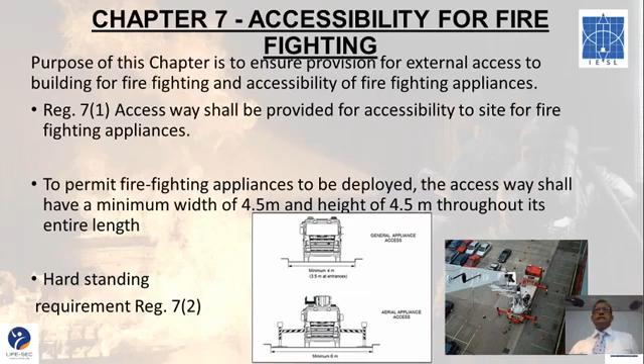The fire brigade has vehicles that can reach up to 10 floors. If there are people trapped, they can rescue them using this aerial ladder platform. But what happens, you have the podium, you can't take a vehicle inside, right? So this is another area you need to look at, vehicle accessibility.

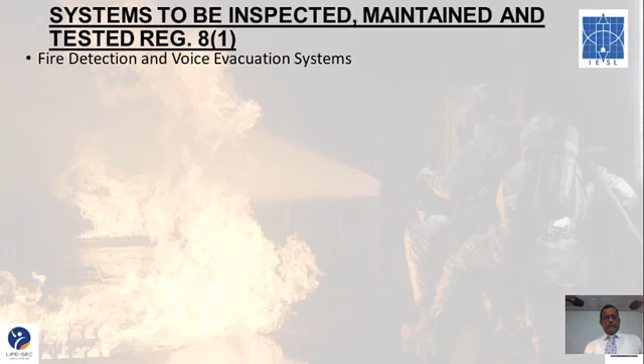Then another important aspect we have put in is inspection and maintenance. All systems have to be maintained. We have given periods, what type, when, by whom. These systems have to be maintained by the client or the occupier.

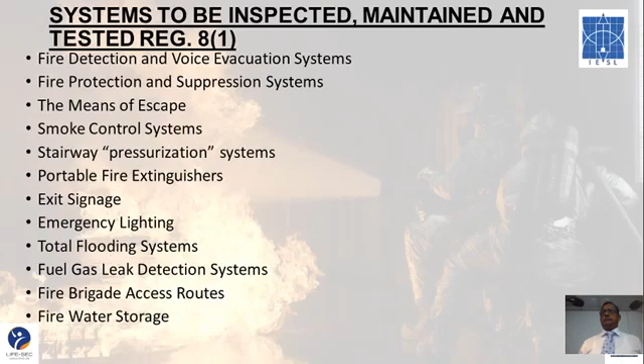I hope everybody now walking into a lift thinks of an incident. When you get into the lift, you think of something, you think of the Green Lanka building incident. People are scared to go in the lift now. When I tell my wife we'll go, she says no, we'll walk. Just imagine the one incident which has given that much fear into people. So fires will give even more fear. To avoid that, these are the guidelines.

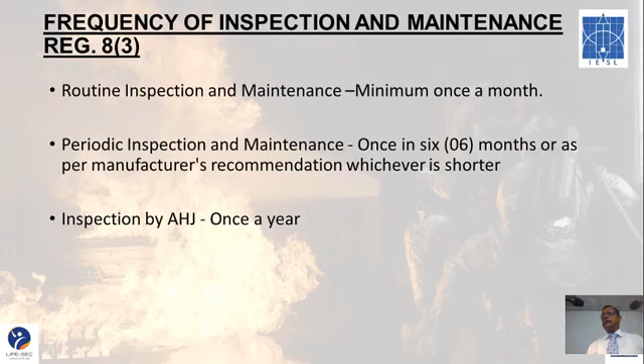Inspection and maintenance includes routine inspection, periodic inspection, and inspection by the authority having jurisdiction. We have put it in black and white, and people need to comply. Routine inspection is once a month, periodic inspection once in 6 months or as per manufacturer recommendation. Inspection by the authority having jurisdiction is by the fire brigade once a year, and you need to get a certificate.

The fire pumps must run for 30 minutes weekly. The electrical pump should run for 15 minutes. These should be recorded and kept. Why? Because next time there's an incident, somebody is going to come and ask you, where are the documents? It happened at Green Lanka when the lift went. Where are the service records? Where is the contract? Where are the servicing records? So many questions asked. So with fire, it will be even worse.

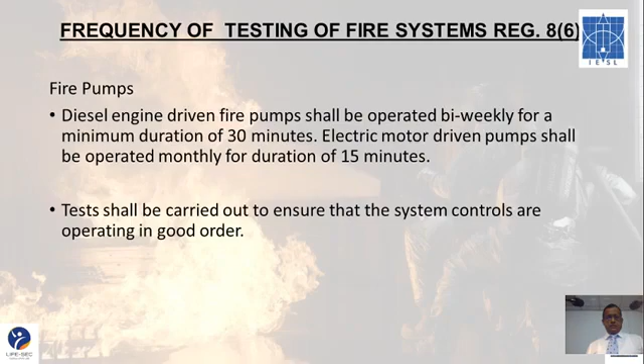Tests shall be carried out to ensure the system controls are working in good order, with annual testing by a competent person or certified by the authority having jurisdiction. We strongly advise going for a service contract, though there's money involved and you can have your own team. But if there's a system installed by a reputed party, you have to get it checked by that manufacturer's representative.

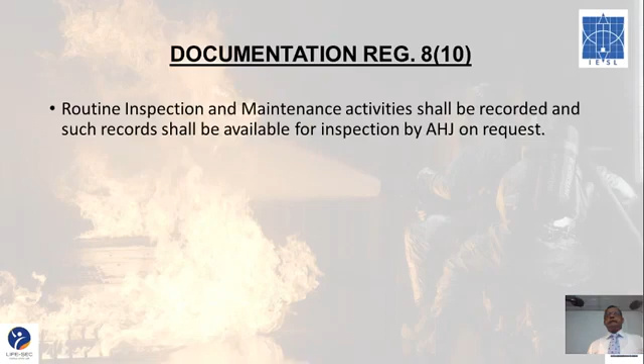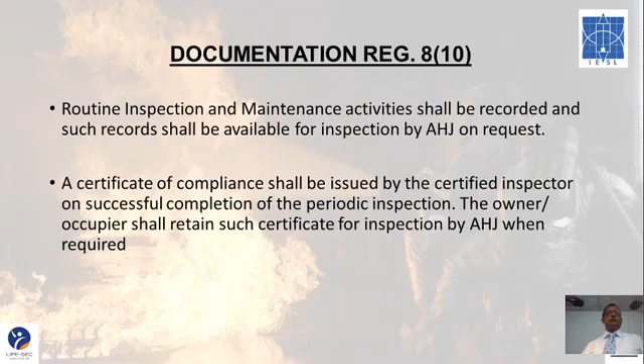Documentation has to be kept and provided to the authority having jurisdiction on their request, and it has to be maintained. A certificate of compliance shall be issued by the certified inspector at successful completion of periodic inspection. The owner or occupier shall retain such certificate for inspection by the authority having jurisdiction when required. These are important because they are in law. You need to comply with this, and someday this document will come in handy.

Conclusion: compliance to regulation. There is a regulation, comply to it. Check your own design, past and present. Don't go check others, check your own decisions, the systems you have done, what are the failures, what you have not done. Because someday you will be there inside that building, or your parents or some relative will be there, and I hope nobody wants to see their children lost like the incident we saw. So it's everybody's concern, everybody's responsibility, and finally it's your responsibility. Responsibility cannot be passed on.

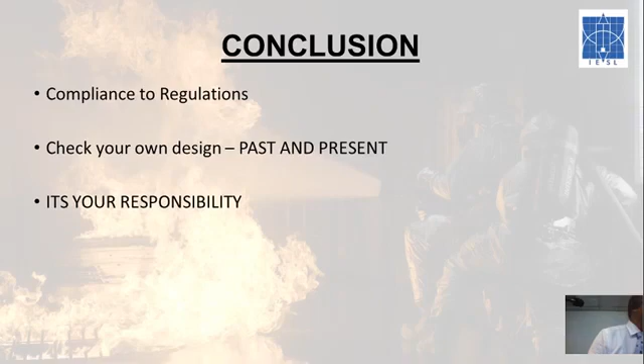Announcement - vehicle number HA7155, the owner should check, vehicle number 7155. Thank you very much, sorry for disturbing.